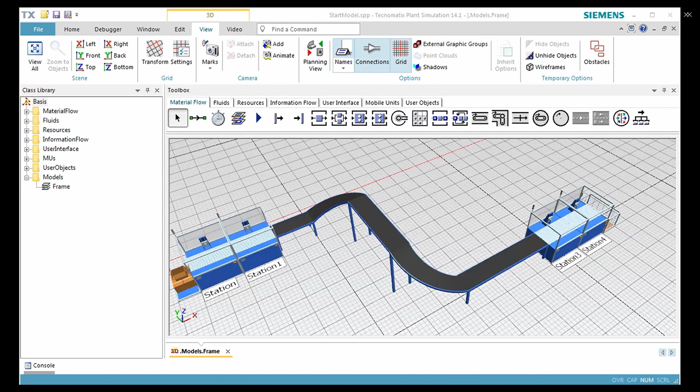This video introduces animating moving objects in Plant Simulation 3D. For this, we use a simulation model with several stations and a conveyor as you see here. We want to see how moving objects are animated on the station.

To do so, we open the context menu of the station and select Edit 3D Properties. Select the tab MU Animation in the dialog which opens. Plant Simulation always creates an animation point called default for objects of type station. This animation point is used to show the moving object which is located on the station.

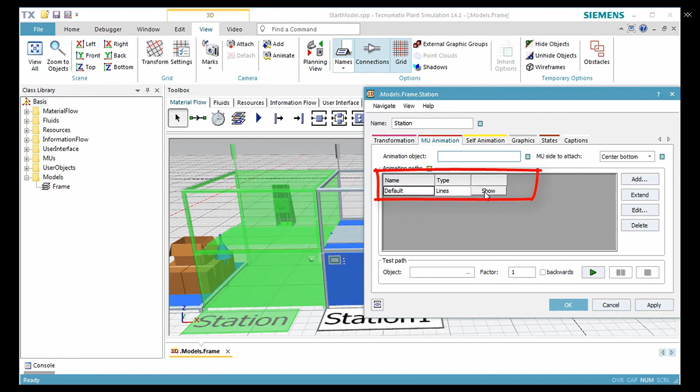To visualize this animation point, we click Show. The animation point is shown with a red path mark on the station. The default setting is to position the moving object with the center of the bottom on this animation point.

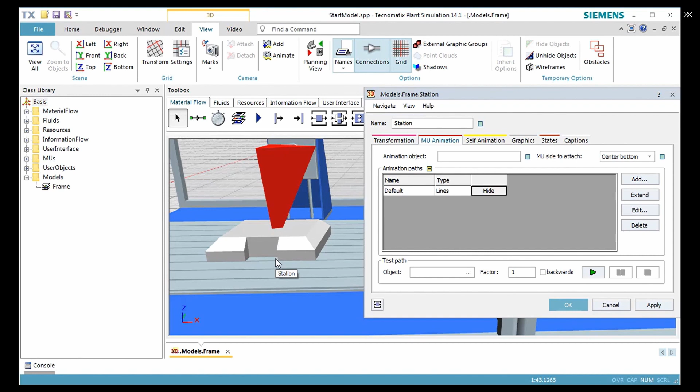We want to change the position and rotation of this animation point. For this operation, we will switch to Snap to Grid and Snap to Object on the menu bar in Edit. We drag the animation point to the new position and drop it there.

To rotate the selected animation point, hold down the Control key and press the left or right arrow key on the keyboard. This will rotate the animation point by 1 degree. If you also hold down the Shift key, the object will be rotated by 45 degrees.

If you know the exact position, you can open the 3D Properties dialog of the animation point. To do so, open the context menu of the animation point and select Edit 3D Properties. Here we can define the position and rotation of the animation point. Remember that the position is relative to the position of the station.

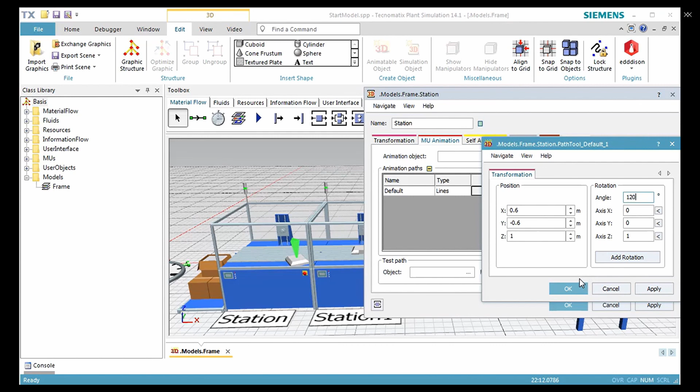We close the dialog and start the simulation. Now the parts will be shown at the new position.

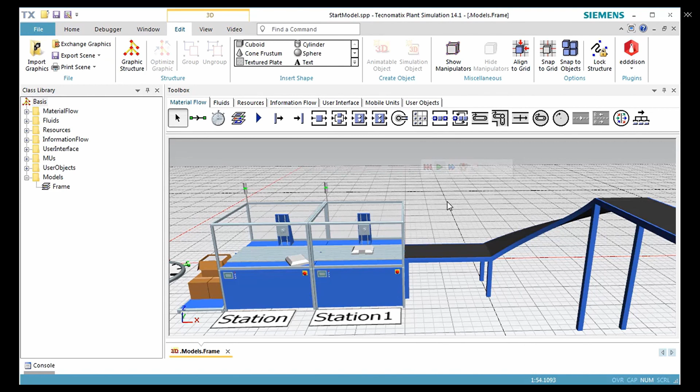In the following section, we want to show how to animate objects using an animation area. Place oriented objects like parallel stations, store, container, and transporters can have an animation area. In this example, we use a container to demonstrate the usage of animation area.

We first duplicate the container in the folder MU of the class library by selecting Duplicate in the context menu of the container. This creates a new class object named Container1. We open the dialog of Container1 and set the X dimension to 3 and Y dimension to 4.

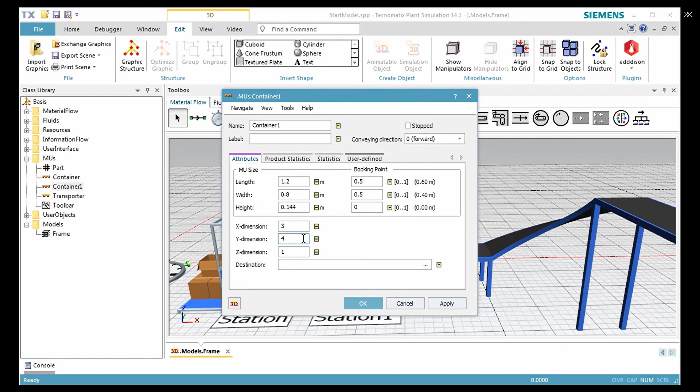Then we open the 3D window of Container1. Now we click Exchange Graphics on the menu bar. In the dialog which opens, we select the folder Containers and then select one of the boxes. Plant Simulation asks if we want to set the size of the container to the size of the graphic. Click Yes to use the size of the imported box.

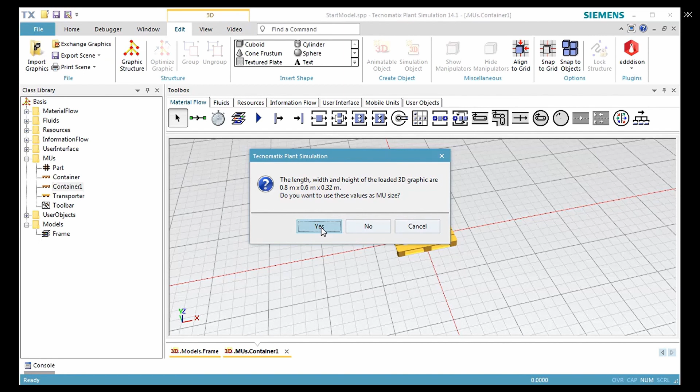If you do not accept the adaptation of the dimension, the box will be scaled to the current size of the container. Because Scale Automatically is turned on by default, the graphic of the container now changes to the box. The S3D file which is loaded not only contains the graphic of the box, but also includes information about the animation. This is the difference to JT files, which only contain graphics without any animation.

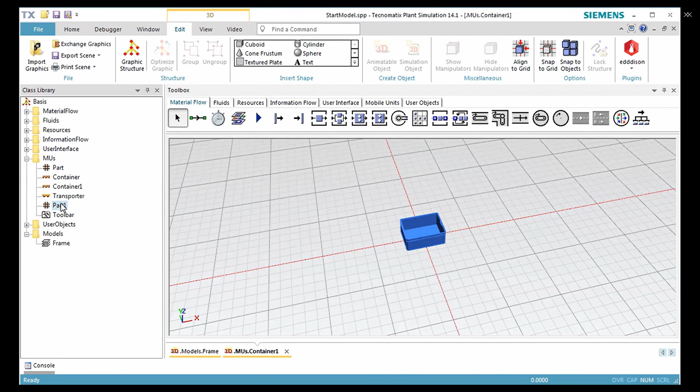We also duplicate the part in the class library and open Part1 in the 3D window. Delete the graphic of Part1. This time we create a graphic of our own. We select cylinder in the Insert Shape drop-down box from the menu bar.

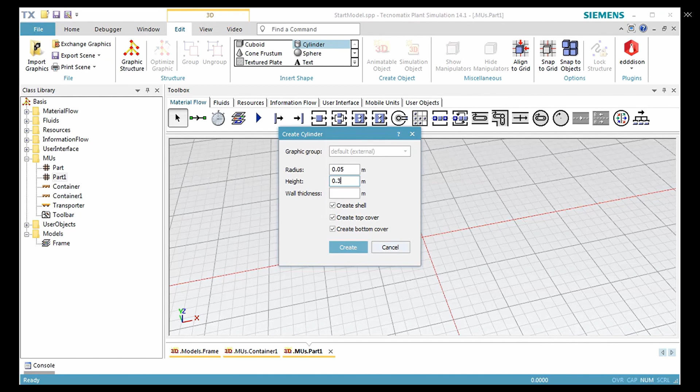We enter 0.05 meter as the radius and 0.3 meter as the height of the MU. We click Create and position the graphic in the center of the frame. To make sure that the object is in the center, we open the 3D properties dialog and edit the position. Now we can close the 3D window.

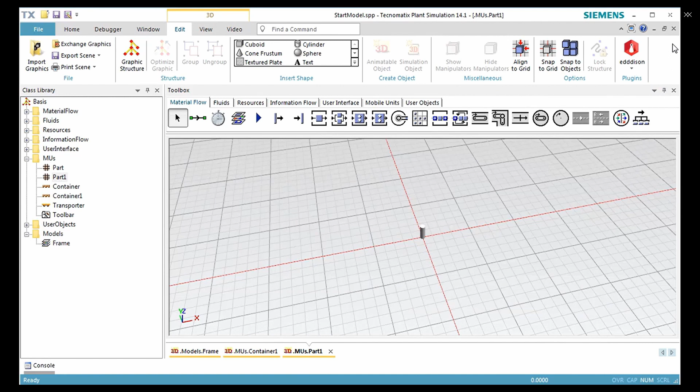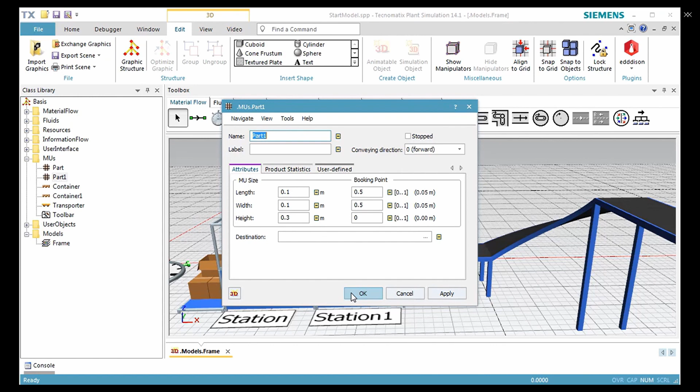We need to set the length and width of part 1 to the size of the new graphic. Double-click part 1 in the class library to open its dialog. Select the menu Tools and select Calculate Dimensions from 3D. This sets the length and width of part 1 to 0.1 meter and the height to 0.3 meter. We then close all open windows except the window of our simulation model.

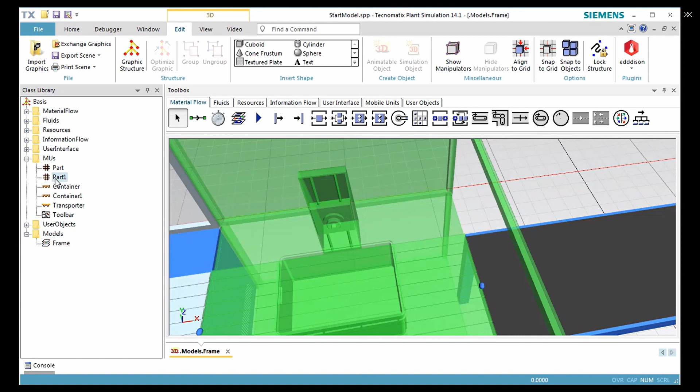Now we drag container 1 to station 1 and drop it there. Next we drag part 1 to the box we just inserted and drop it there. We repeat this until the box is filled. All instances of part 1 are perfectly aligned in the box. This is achieved by the animation area of the box.

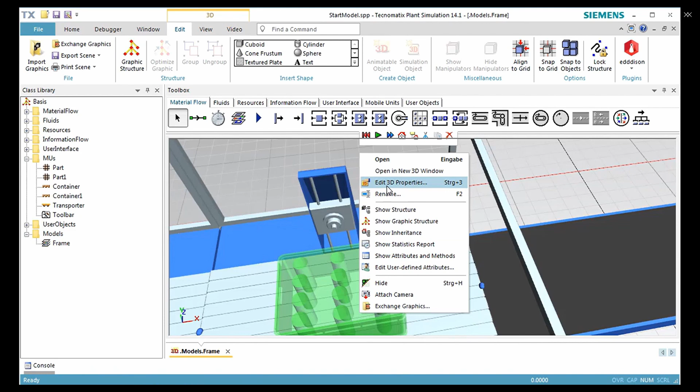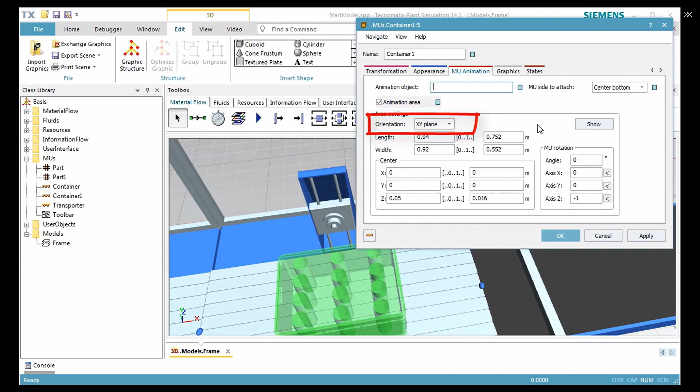We open the 3D property dialog of the box and change to the tab MU Animation. We see the animation area is activated. The orientation defines in which orientation the parts will be shown. The setting XY plane distributes the parts in the XY direction as we see in the box. The setting XZ plane, for example, can be used if the parts are stacked in a shelf or something similar. Click Show to visualize the animation plane and the MU orientation indicator.

The text box length defines the length of the animation area. In our case of the box, we only use 94% of the length of the box, which corresponds to 0.752 meters. Accordingly, we use 92% of the width of the box, which corresponds to 0.552 meters. Within this area, the animation points are equally distributed as we can see in the box.

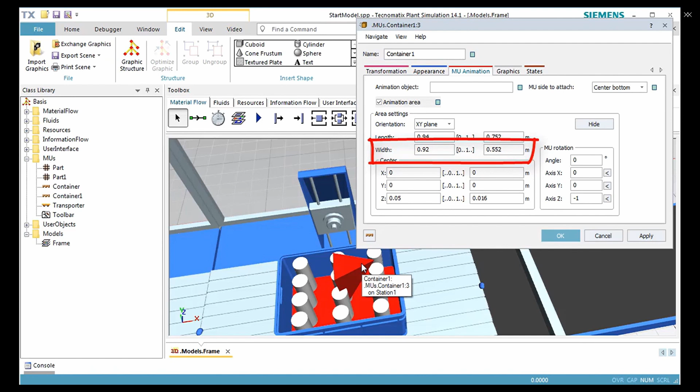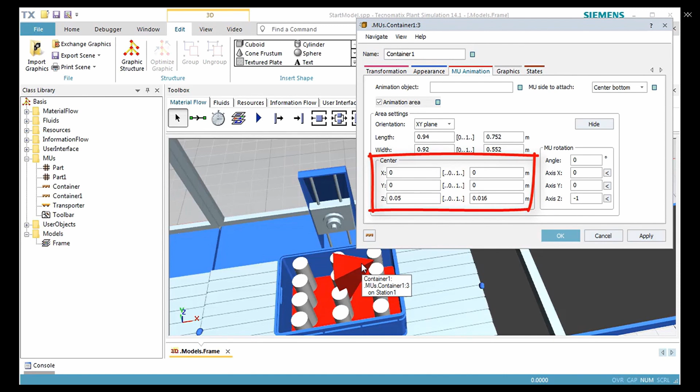The length and width of the animation area can be greater than 100%. This is why you can see two dots behind the one. For containers, this normally does not make sense. In the center group, we can specify the position of the center of the animation area. Because the bottom of the box has a defined thickness, the Z position of the animation area is located at 0.016 meter.

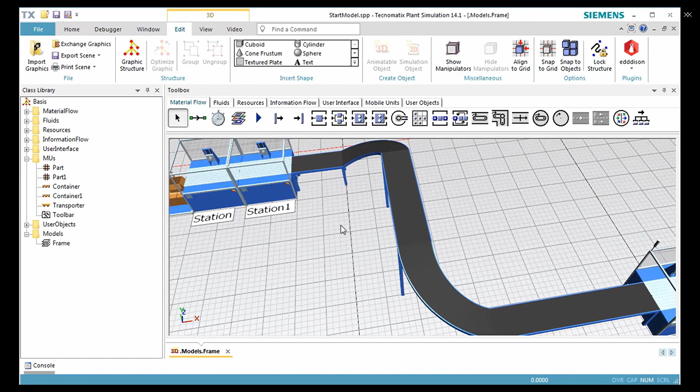Next, we want to take a closer look at the animation of length-oriented objects. We open the 3D property dialog of the conveyor and change to the tab MU Animation. We do not see any animation path because the animation on those objects is created automatically from the geometry of these objects. On the right side of the dialog, we see MU side to attach. Normally, the moving objects are placed flat on the conveyor. Therefore, the center of the bottom side of the moving object is attached to the animation of the conveyor.

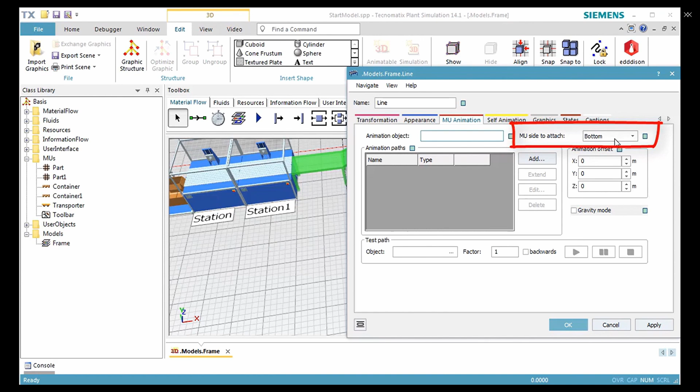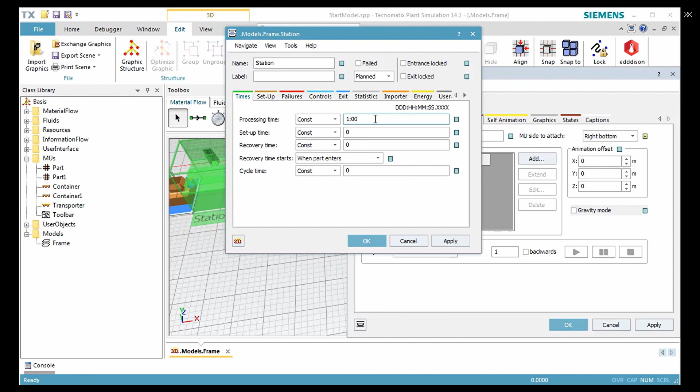Now we want to change the MU side to attach. To do so, we select right bottom and click Apply to make the changes valid. To make the simulation run a little faster, we set the processing time of station and station 1 to 1 minute. We reset and start the simulation. Now the parts will be shown on the conveyor and the right side of the parts is aligned with the center line of the conveyor.

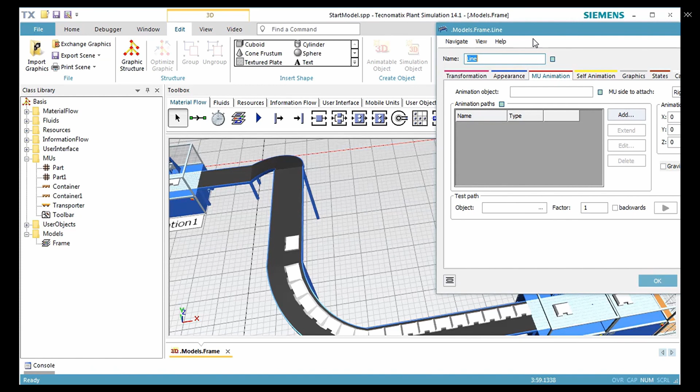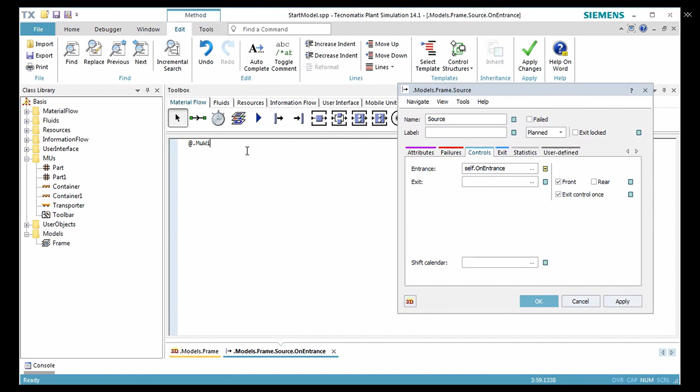Next, we create an entrance control which varies the width of the product in the source. To do so, we open the dialog of the source. On the tab Controls, we click the three dots of the field Entrance Control and select Create Control. In the method which opens, we use the uniform distribution for defining the width of the part. We reset and start the simulation. Now we see the right side of all parts is located at the center of the conveyor, which also is the animation path of the conveyor.

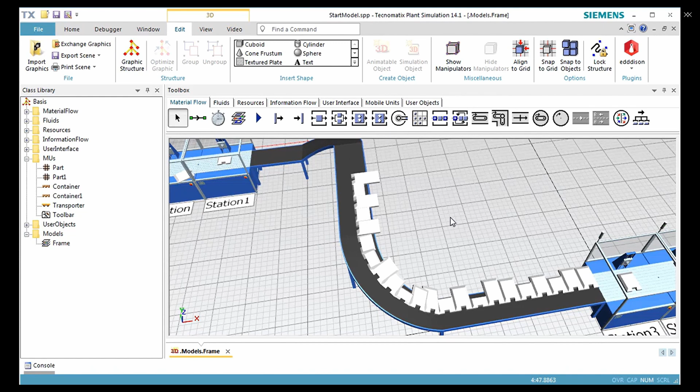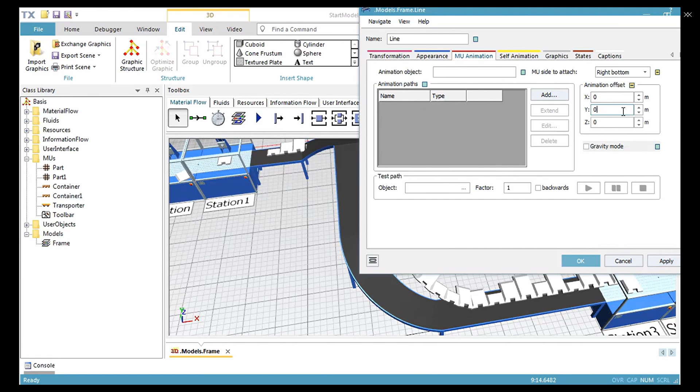You can also define the animation of the products with an arbitrary offset to the animation line of the conveyor. To do so, we just have to enter the respective setting below animation offset. The animation offset in the X direction generally does not make any sense. And for the Y direction, it only makes sense if you have one straight segment. This is all for today's topic, animating parts in 3D. To gain perfection, keep practicing and experimenting with different values.